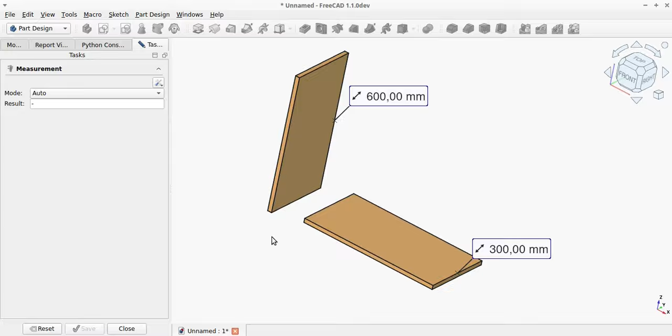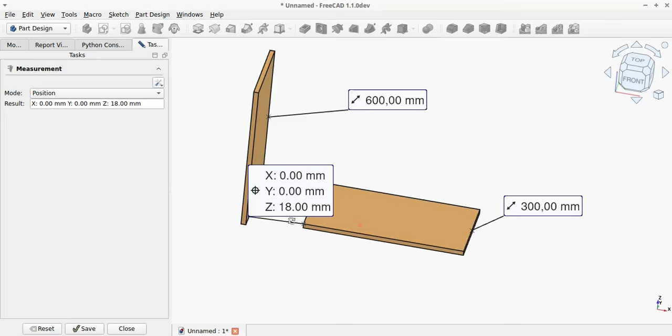The PartDesign workbench allows you to measure edges in a way that is useful for furniture design. This standard measurement is attached to the center of the edge and tracks changes in edge size and position. Unfortunately, the distance from the vertex to the face is measured diagonally. From a furniture design perspective, this measurement is incorrect.

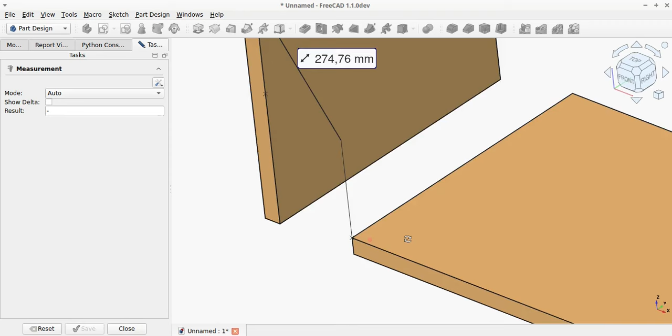The same applies to measuring from the vertex to the selected edge. This measurement is also taken diagonally, which is of little use for furniture design.

In FreeCAD, measuring edges is also possible using the Draft workbench.

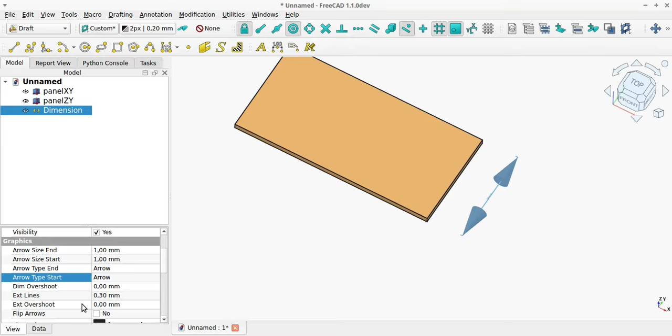However, this requires some effort to ensure the dimensions are properly aligned with the edges and are readable. You need to change both the arrows and the text size to make the dimension readable.

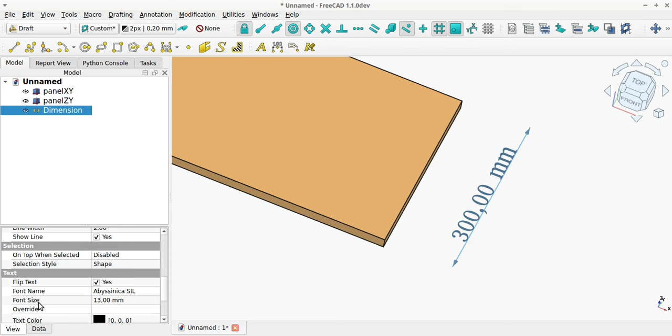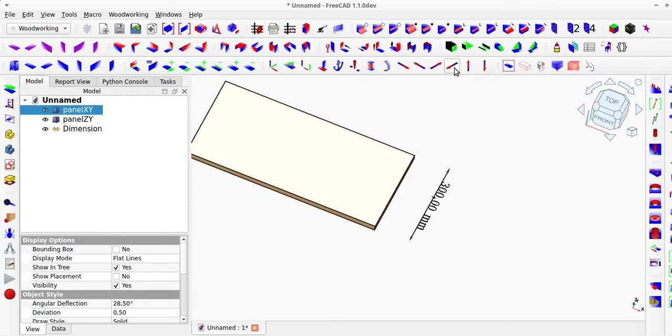This type of measurement is also parametric and follows changes in edge position and size. But containers are not supported.

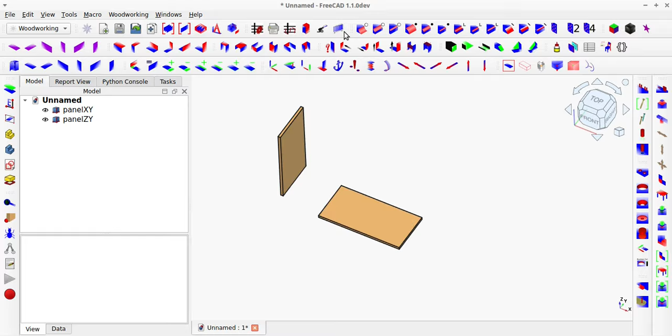A dimension drawing style option has been added to the Magic Measure tool in the Woodworking workbench. You can select the PartDesign dimension style from the list.

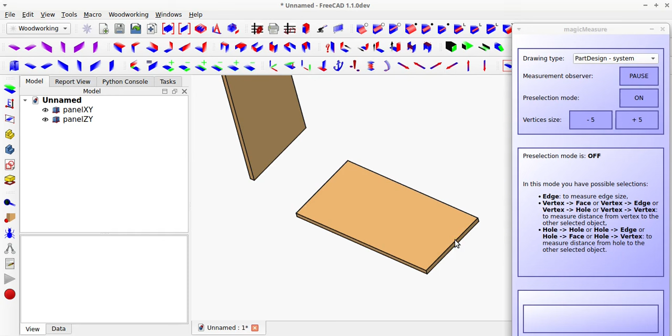For edges, the dimension looks similar, but in this case, the measurement points are the vertices of the edge, allowing the dimension to lie directly on the edge and be moved away from the edge.

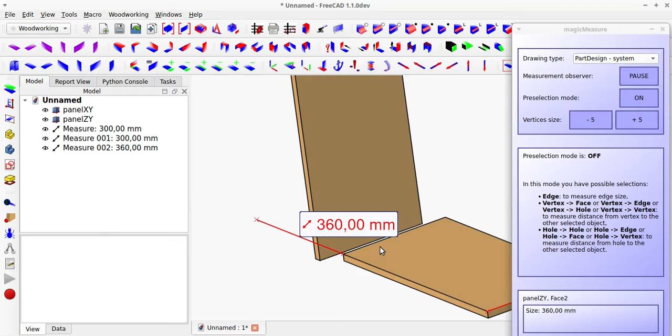When measuring from vertex to face, the measurement is taken along a straight line, allowing you to obtain the correct distance of the board from a given face when creating furniture.

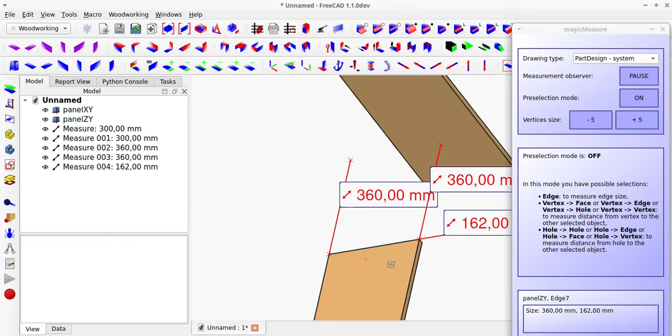The same improvements have been made for measuring from vertex to edge. However, in this case, two dimensions are displayed in two coordinate axes directions different from the edge axis. This allows you to immediately measure distances in both directions.

These dimensions are parametric and follow changes in the position and size of the board.

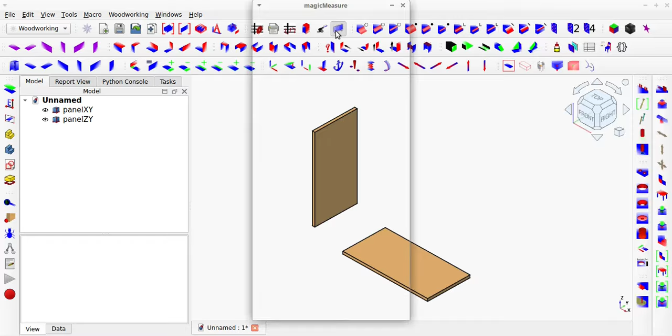In the Magic Measure tool in the Woodworking workbench, you can also select the draft dimension drawing style. In this case, the text size is automatically calculated relative to the distance.

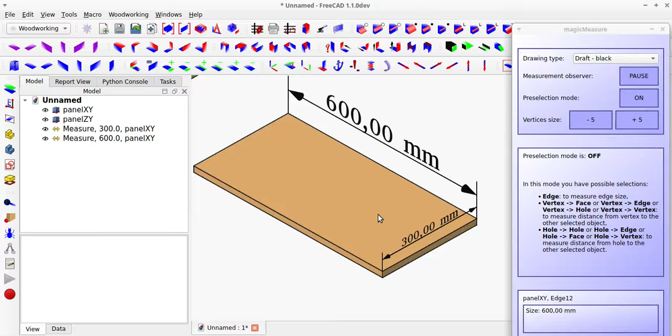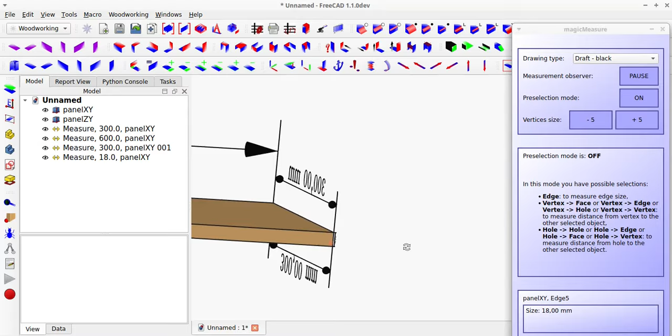This ensures that smaller dimensions don't obscure other dimensions from a longer distance. Additionally, the measurement position is calculated relative to the board's position so that the dimension is always outside the measured element.

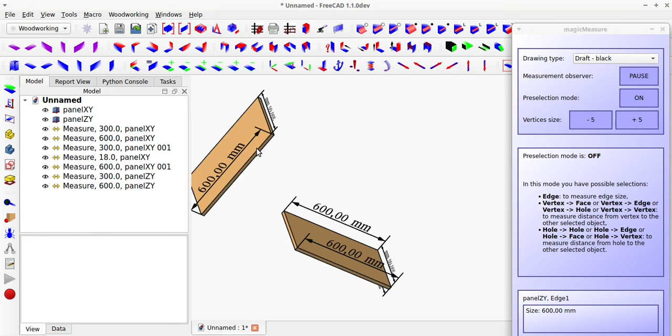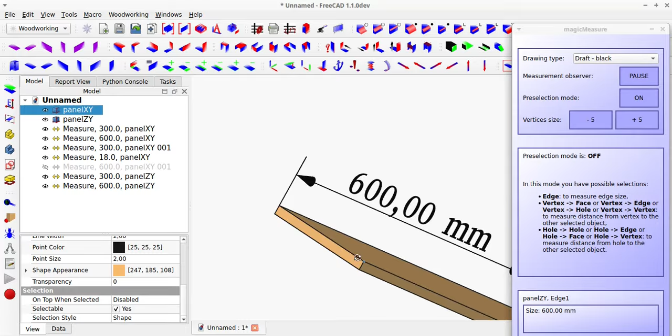In this case, measurements from the vertex to the face are created in a straight line aligned with the coordinate axis, allowing for the correct distance.

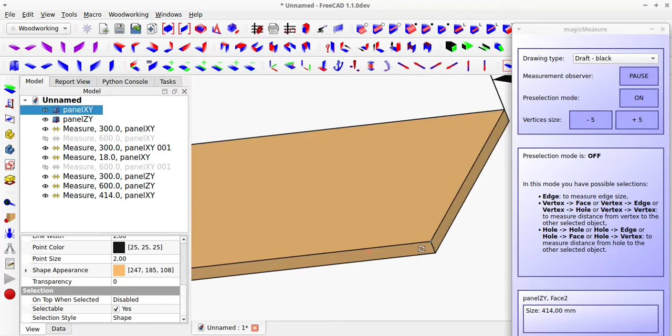For measurements from the vertex to the edge, two measurements are also created unless the measurement is 0.

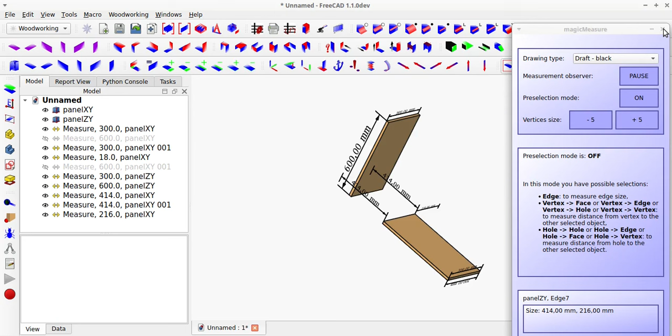All measurements created this way are also parametric and follow changes in the board's size and position, and in this case they support containers.

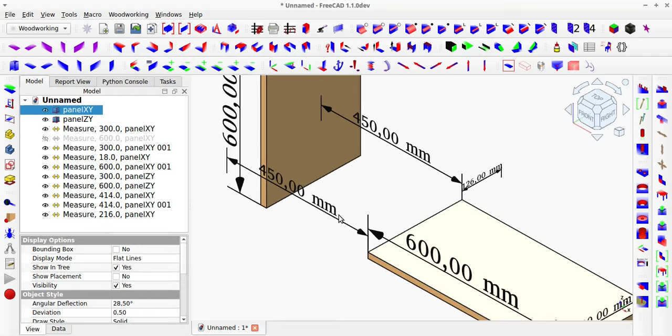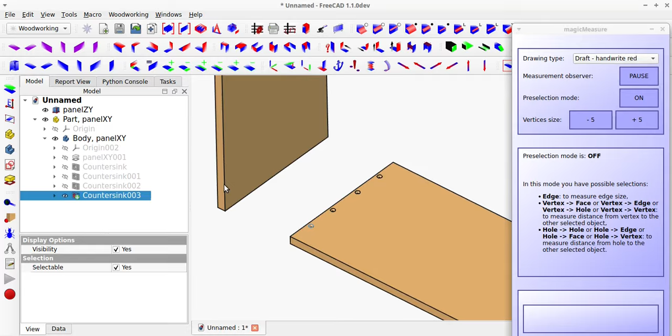This method also allows you to measure the distance of a hole from a selected edge in both directions. All hole measurements taken this way will be clearly displayed and will track changes in edge position.

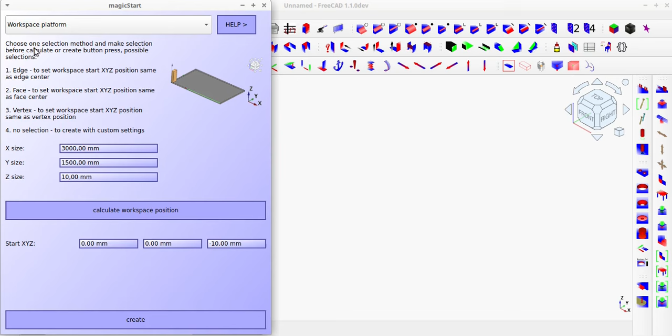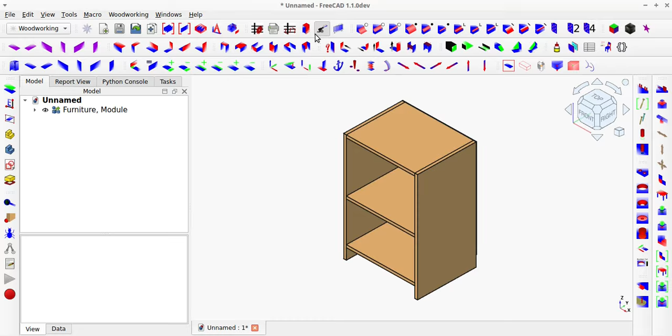A new tool called Show Measurements has also been added to the Woodworking workbench, allowing you to quickly enable or disable dimensions.

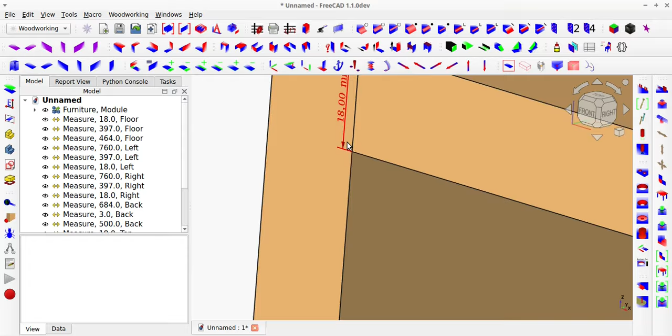The first time you click this tool, the dimensions for all boards and all edges will appear. These dimensions will also be parametric and will follow changes in board position. This allows you to quickly create dimension documentation using the Magic View tool and various views.

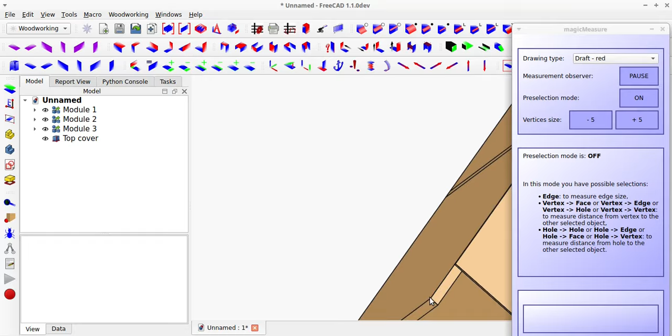Documentation with visible measurements can also be created using manual measurements. In this case, you can use different colors, for example red, to mark the external dimensions of the entire piece of furniture. Additionally, some edges can be marked, for example black.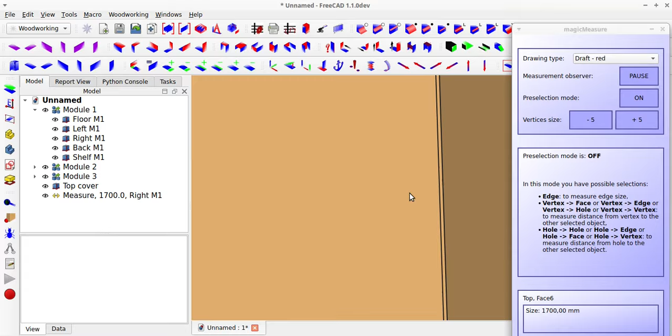Distances between shelves are marked in green and shelf dimensions are marked in yellow. This allows you to immediately see in the exported TechDraw view which measurements are the dimensions of the entire piece of furniture and which measurements are additional dimensions of individual elements.